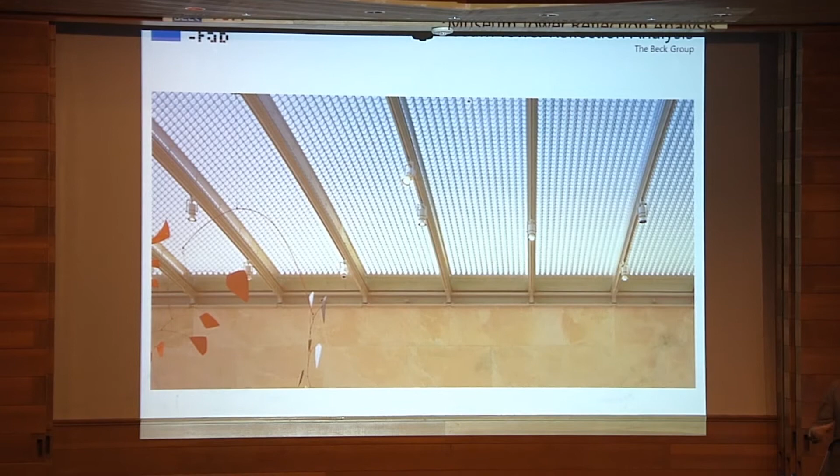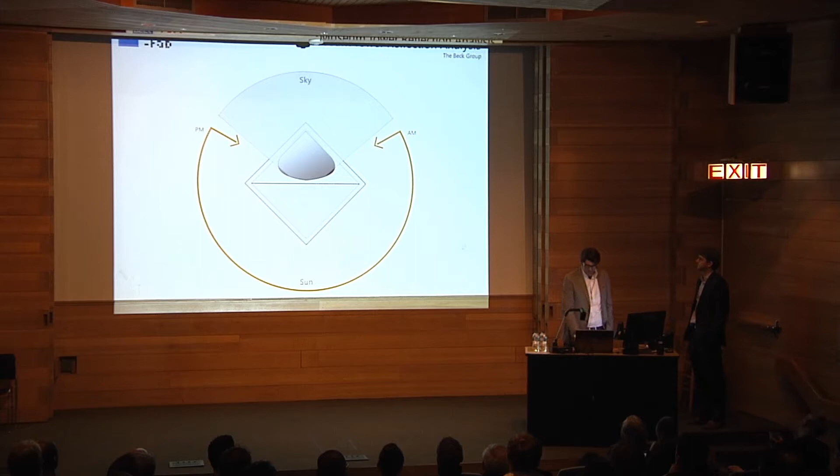So what they did is they developed a customized cast aluminum oculi system covering the roof in a smaller module. Here you see it from the top across the vaulted roof. And here are the oculi themselves, specifically calibrated to block all southern light and allow only the northern light. When you place them together in a small module, you have a clear view of the sky. Here is one of those individual pieces, and here's the scale, about 3.5 inches by 3.5 inches square on each one.

So within the last year and a half, when the Museum Tower started to be erected, they immediately realized that this could be an issue. The tower sits directly north of the interior portions of the galleries, as well as the garden. This was a site that was somewhat contentious. I think Renzo actually suggested to the city probably 12 years ago that this site should be reserved as a park, knowing that there could be issues of light reflection.

But anyway, about a year and a half ago, the glass started going up, and immediately we started to see problems as the interior galleries then became this. This is a very intense situation where the light is being spread over the galleries. Currently, they have put a temporary film over some of these spaces and have moved a lot of pieces out into other museums for temporary holding until they can find a reasonable solution with the tower.

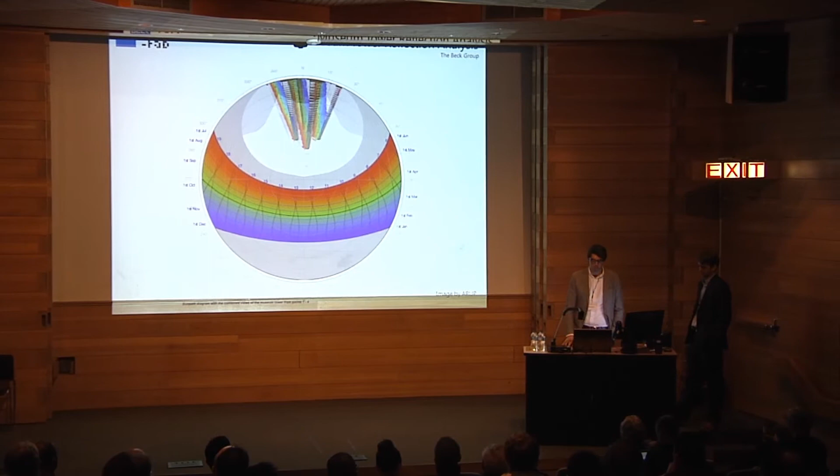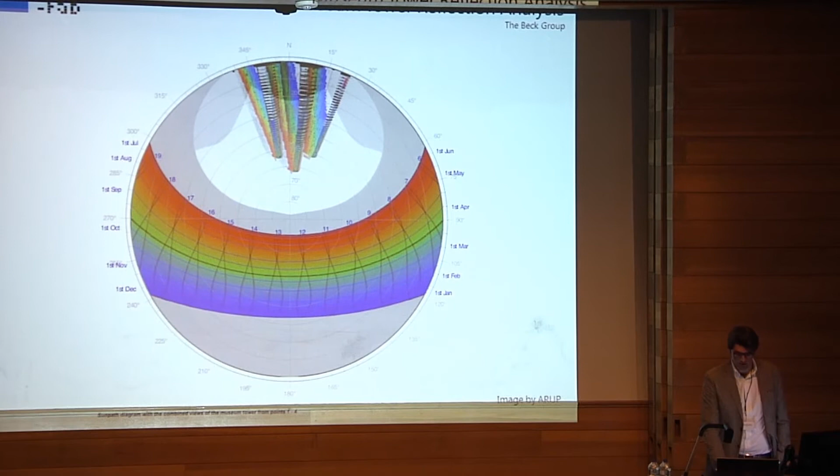They also brought on Arup, who was the original structural and mechanical engineer on the project, to do some analysis on heat gain for their garden as well as the interior gallery. So you see analysis that was done before we were even involved about how the light was going to, in a general sense, reflect off the building. Looking at the glass, 44% reflectivity is on the high side of what any building would use.

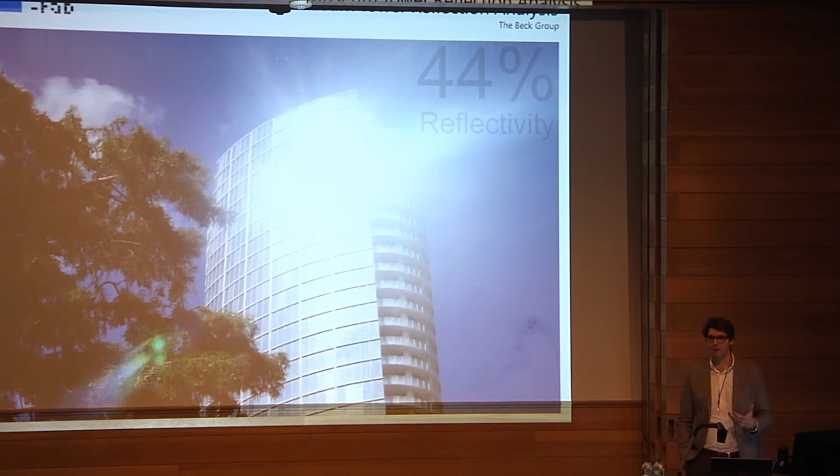This is about when we were called by the client, and they came to us saying, okay, we can very much understand in principle what is happening. The sun's hitting this building and coming into our building. But what we don't understand is the technical nature of it, where and when and how this is happening. I think it's appropriate to go to the next slide.

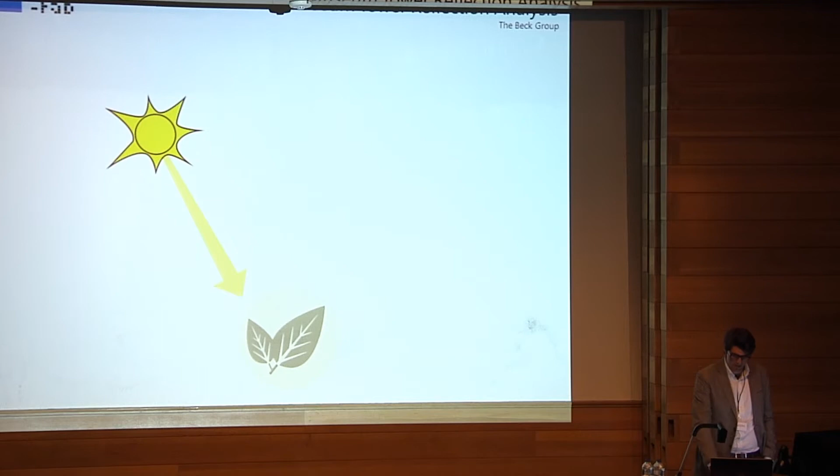As you can see, with their garden, once you just take the sun, it could be an appropriate situation, but adding another percentage of that sun could start to have negative effects on your facility.

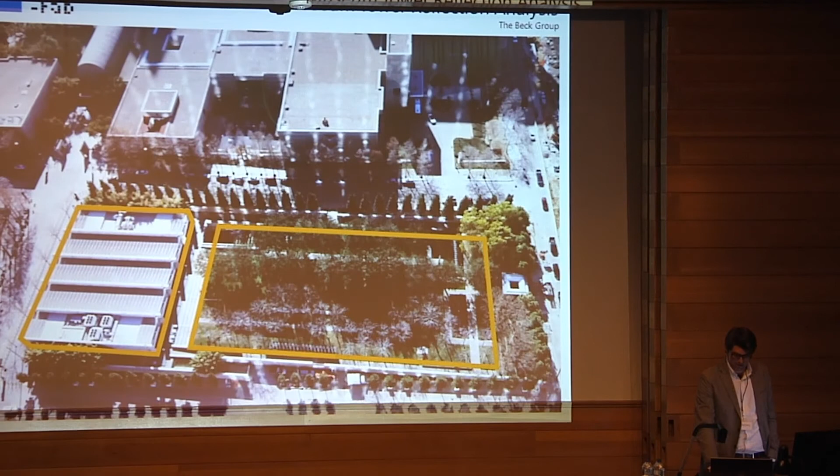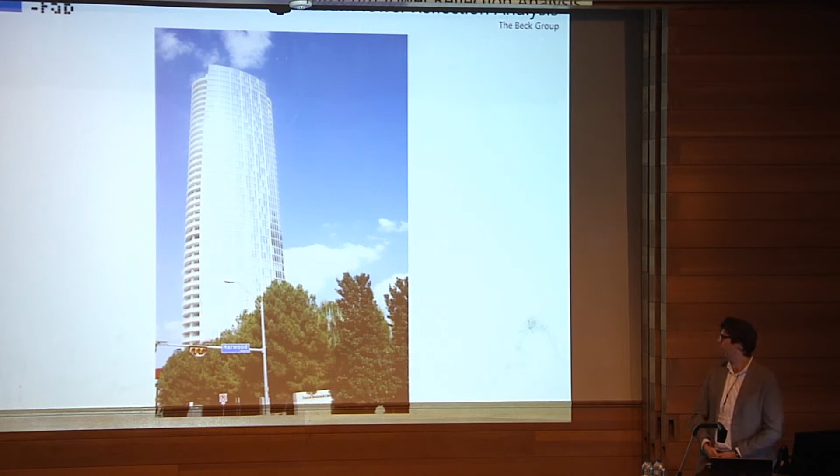So this building itself, here we go. The shape of this building, if you're familiar with it, it's curved in plan on either side and also has a taper as it goes up, and has over 1,000 unique 4.5 foot by 12 foot tall panels that all cant backwards as well, so it has a shingling effect. So every single panel on this building is oriented in a different direction, and therefore will have a different reaction when the sunlight shines on it.

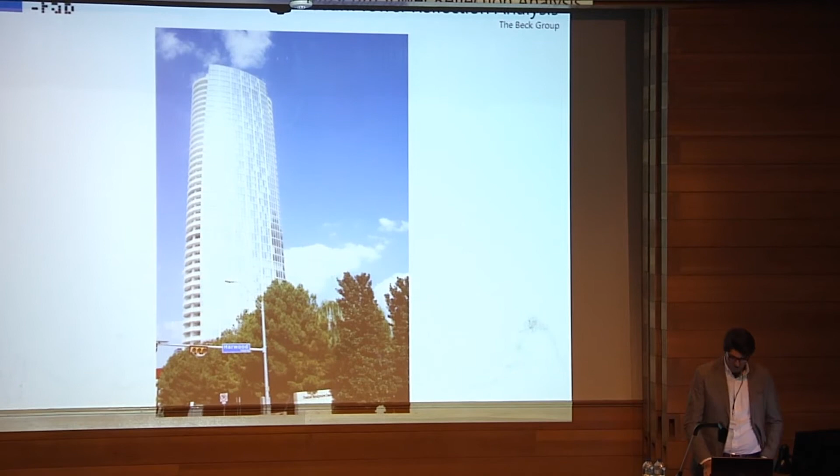So our task was to try to analyze this information in a short period of time to provide the client a more explicit understanding of the problem that they were going into as they were preparing to have discussions with the group from the museum tower. So our job was really to analyze this and provide them with a basis of knowledge for them to move forward.

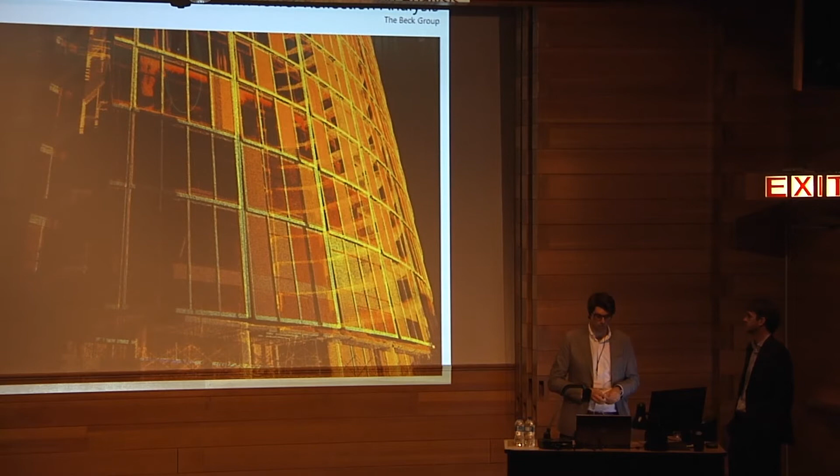So along those lines, as soon as we put our heads together, our first thought was, all right, there's many routes that we could take in order to solve this problem, but any of those routes, we know one thing's for sure, we're going to need an accurate model of the building. So one of the first things we did is call up a local laser scanning crew and sent them out to scan the building so we could get accurate as-built information on how these panels were forming. So that was step one of the process while we were still putting heads together.

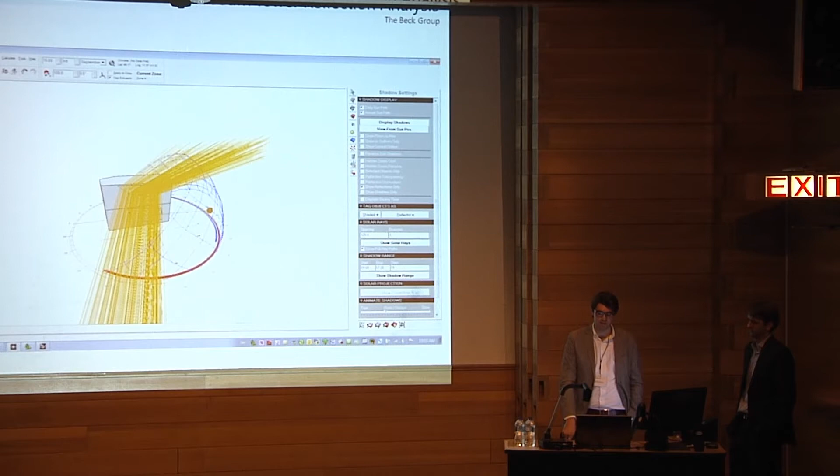Trying to figure out what we were going to use, we then went through a process where we looked at several systems and tried to evaluate what was the most appropriate software to use for this problem. While many of these systems like Ecotect had the capability to solve the problem, they weren't maybe as appropriately suited as others might be. With Ecotect, we couldn't customize the granular information that we needed for that problem.

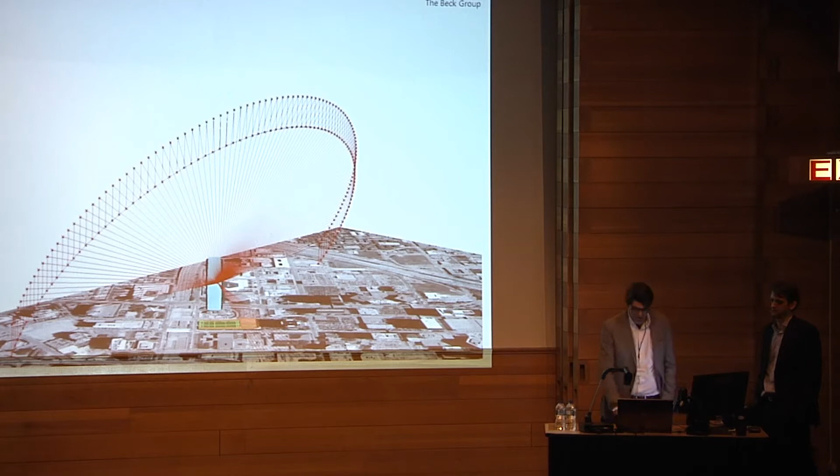So we went through looking at Ecotect as well as Grasshopper, and Grasshopper was a good way for us to quickly mock up potential ways in which we're going to understand these reflections. But considering all of the unique instances for all the panels and the amount of iterations and calculations that we have to run, feeding information back into itself in Grasshopper just wasn't going to work as well as we had hoped. But it did help us very much to design the algorithm that we were going to use.

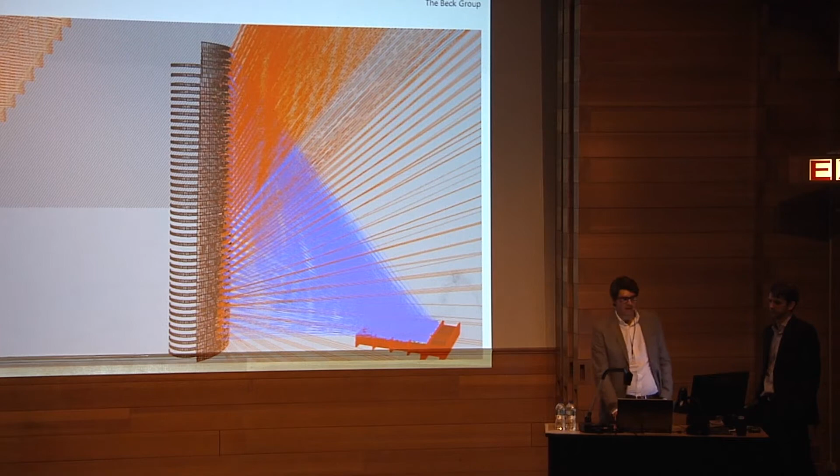And then we ultimately decided on scripting specifically with Python in order to run through these millions of calculations at intervals in a day to really seek out what was the worst case condition for every window on this building.

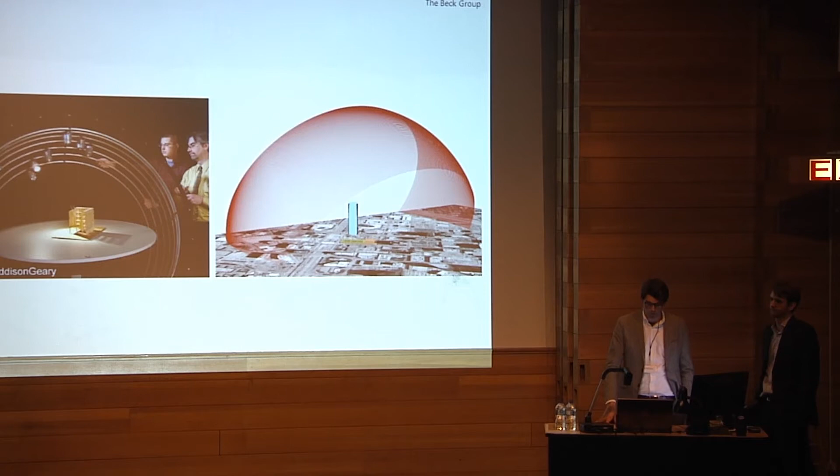So I thought this picture was pretty amusing, the traditional method of the Heliodon versus where we are now. We reconstructed the digital sun path within Rhino, so we could use those paths to generate points at which we were going to study this building throughout a day, taking those paths and breaking them down. And as we subdivided the day, we needed to be very specific on what points in the day were going to be the worst and what points were just bad situations.

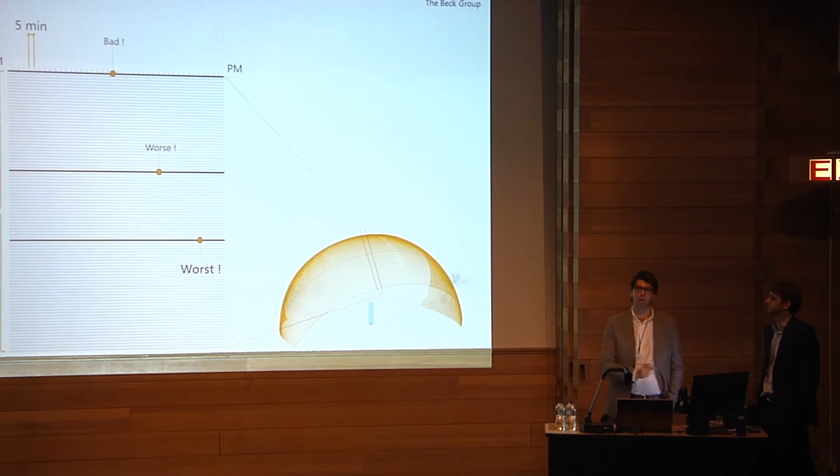So we had to base all of our calculations on pretty much the worst case scenario across the entire year. So every panel had to be calculated for a certain interval of the day across the entire year, studying both a condition that affected the interior gallery and the garden, as they have different areas and different relationships to the existing building.

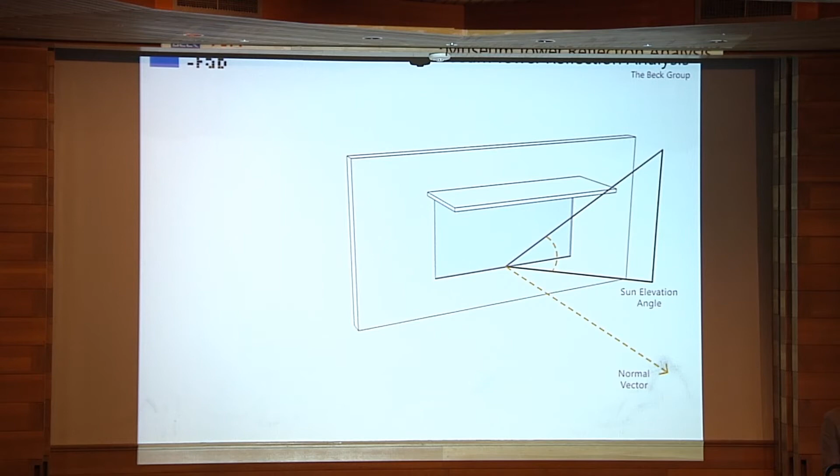One thing, if you've ever done reflection studies, is understanding that you're going to have to calculate a separate angle for shading systems as they relate back to the normal of each panel. And so, again, having a unique angle is going to give us a tremendous amount of data, studying not only the horizontal shading angle, but the vertical shading angle for each one of those panels.

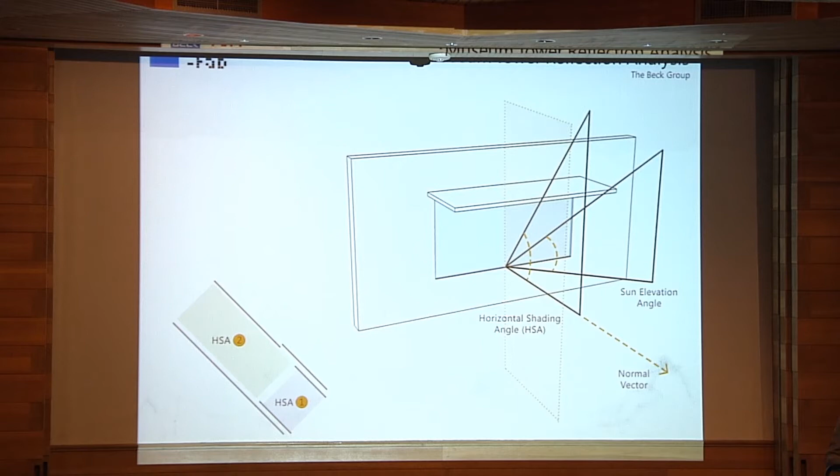So essentially, we went through this process, and aside from doing a few mock-ups, this was kind of our brainstorming effort of understanding that every instance on this building is going to have unique attributes. And we wanted to get to a point where we could have some type of collection of data for each one of these unique panels that we could ask a question and get an intelligent response from. So Frank is going to take us through the next portion of the presentation.

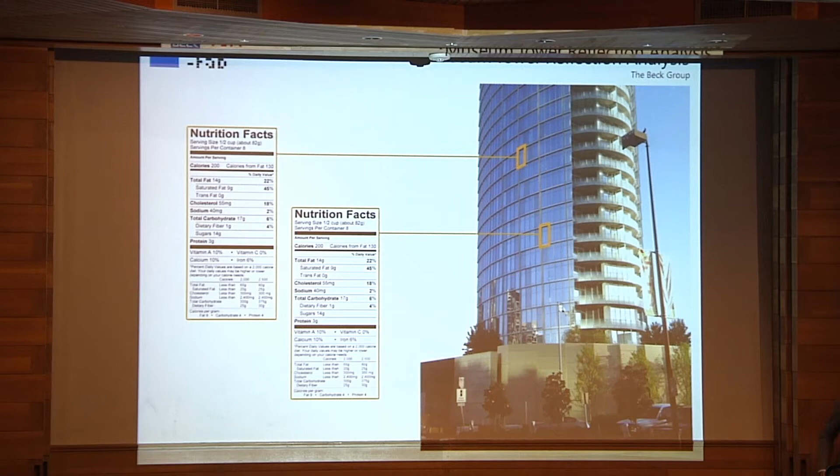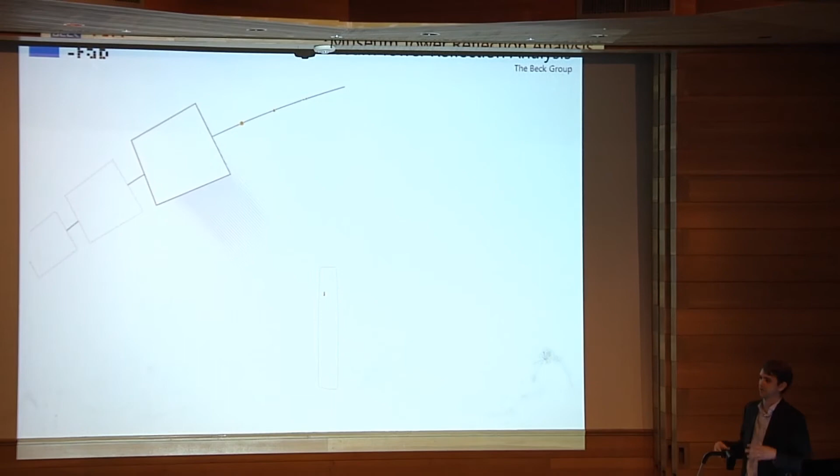Yeah, so sort of like we had these nutrition facts, we wanted to come up with a way to describe a curtain wall panel in a way that is not really particular to Rhino or Revit or any kind of particular platform. We started the process of writing a routine to just collect the information. We tried a couple of different things.

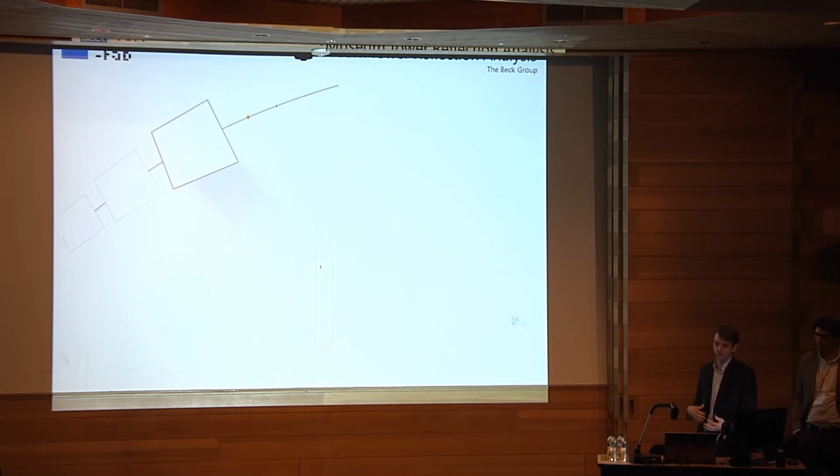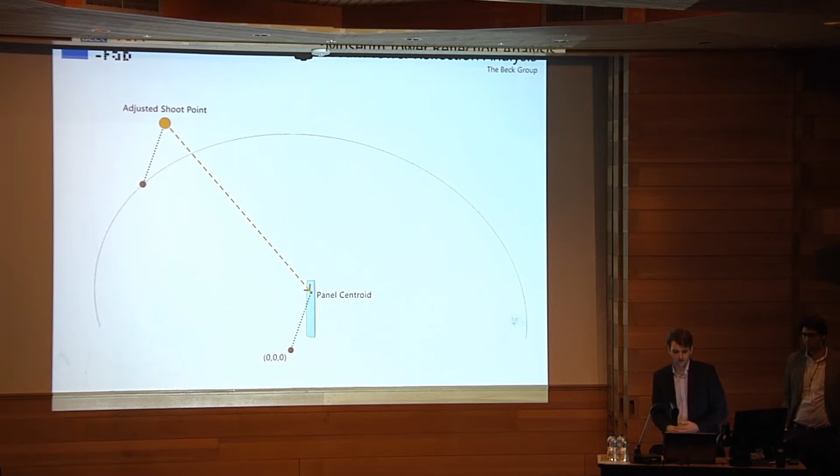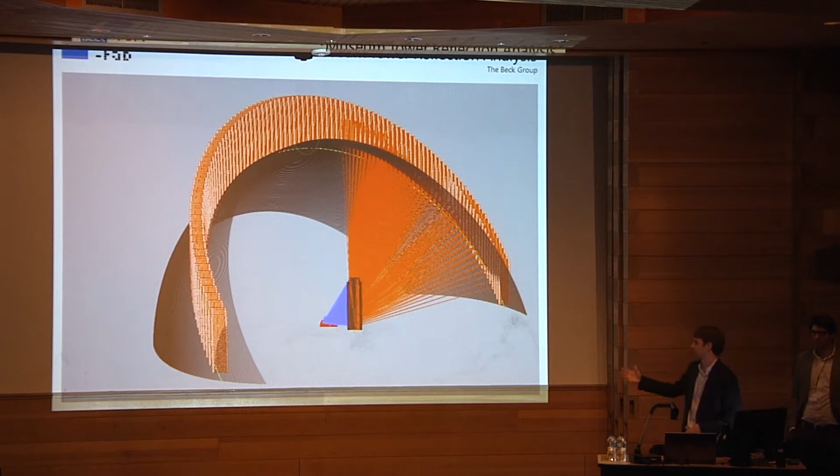This is sort of what one day might look like. I think those are maybe 15-minute intervals. So a lot of time. It's worth noting, if you look back at this slide, when you do this with every panel, you get the effect, if you look at these points going around the path, that sort of resembles the building side.

So how do we measure the horizontal shading angle and vertical shading angle? There are planes that are applied to these curtain wall panels, and then we just make the measurement. This is a lot easier to do than to try to do some sort of calculation. It's easier to make the thing and measure it.

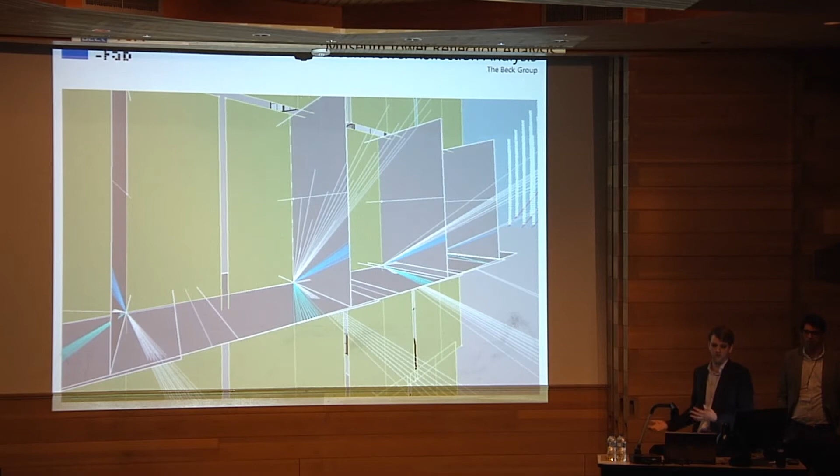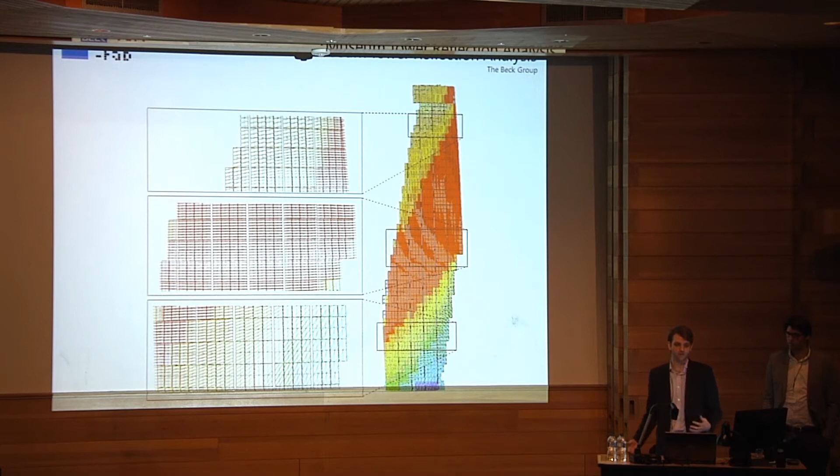We also were very hopeful that we would come up with a really slick, clever solution for the problem. We tried a lot of things, like this is the least amount of square footage of a louver system, but this is just for one day. So when you expand this across all the days, you realize there's not a great solution for this problem. Here's another example of that.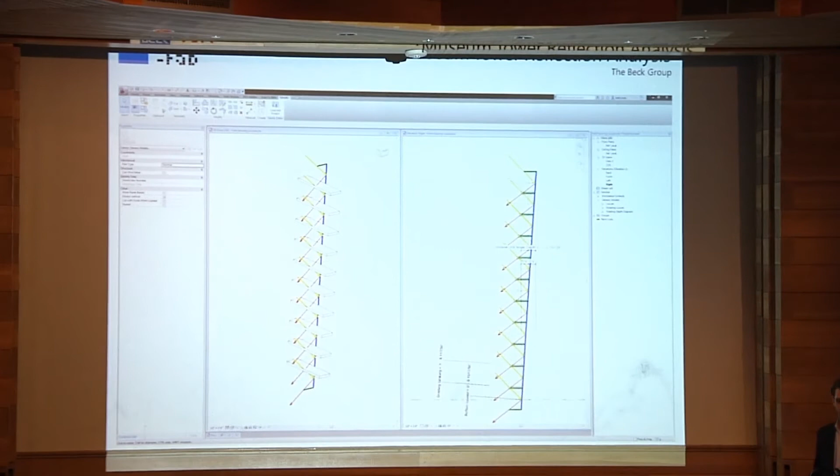So what we started thinking about doing was to bring this data that we're collecting out of Rhino into Revit. We had a guy at a job site who had some time, named Kelly Jones, who helped us make a family for Revit that we could place programmatically using a lot of the same code that we used originally. So this would be something where we could say solve for consistent spacing and vary the depth, or keep the depth the same and change the spacing.

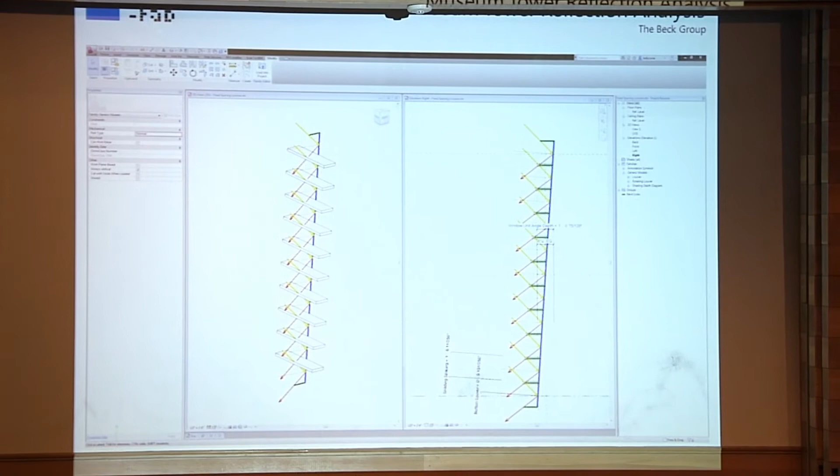I think it's something to note. I don't think we ever really planned or truly entertained having a horizontal louver or vertical louver option, but those were the most simple interpretations of angles that we could use to then make other judgments and explain that to the client. So that was the thought going into creating simple horizontal and vertical. Yeah, a lot of this is to demonstrate to others why this solution won't work.

So just a little bit about the technical process of this. Back to the nutrition facts type of thing. We start with a really basic description of the thing we're describing. In this case, it's a curtain wall panel, and it's got corners, and it's got a middle, and it's going to have a horizontal shading angle and a vertical shading angle, and there's nothing really about either of the platforms that we're using in that description.

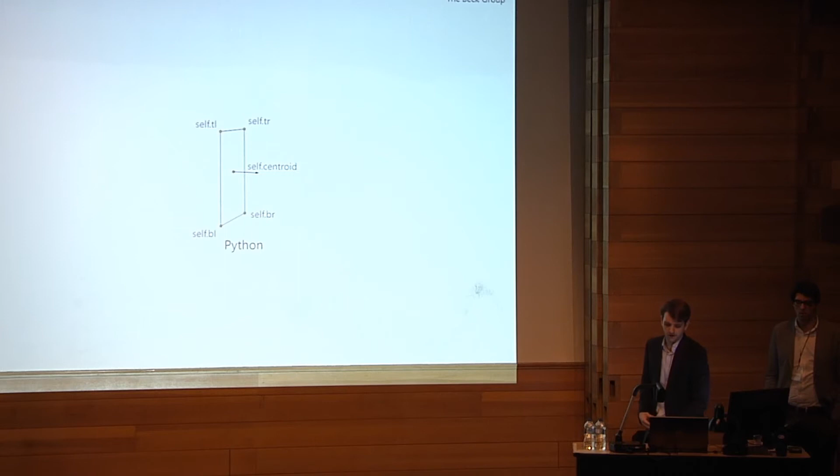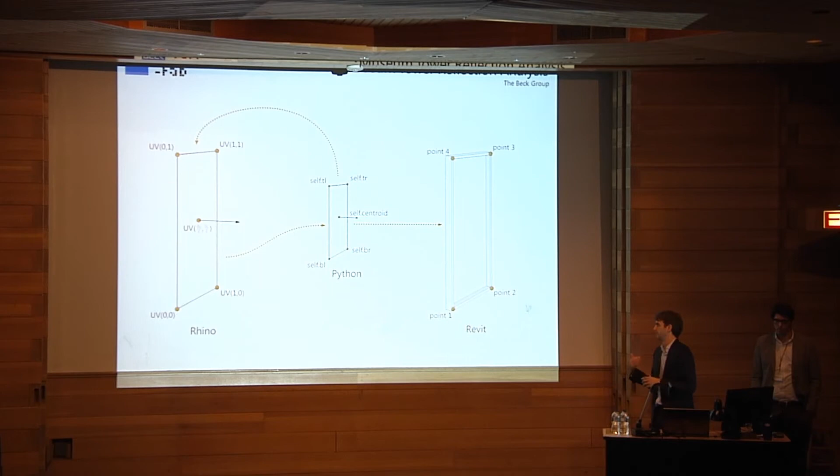And so that lets us use that same description to make the measurements and calculations in Rhino, and we also use the same description to then bring that information into a parametric family. Now, why would we put this in Revit? Here's sort of, this was hours of calculation. Very quick and dirty, and so we just stored these things in a text file.

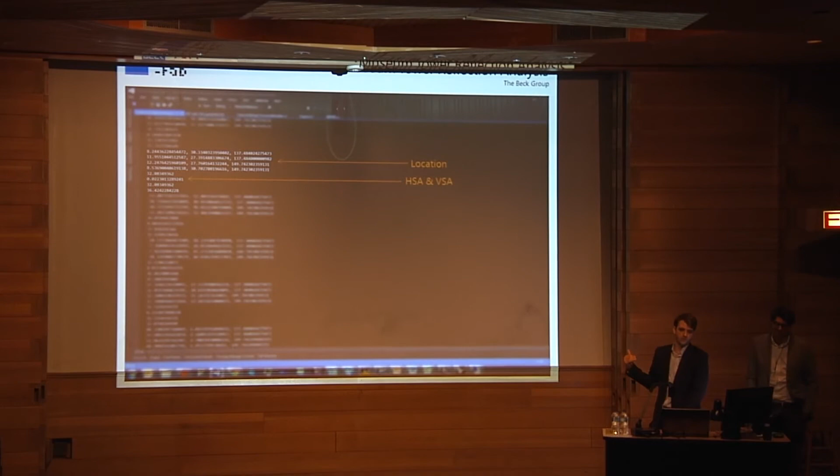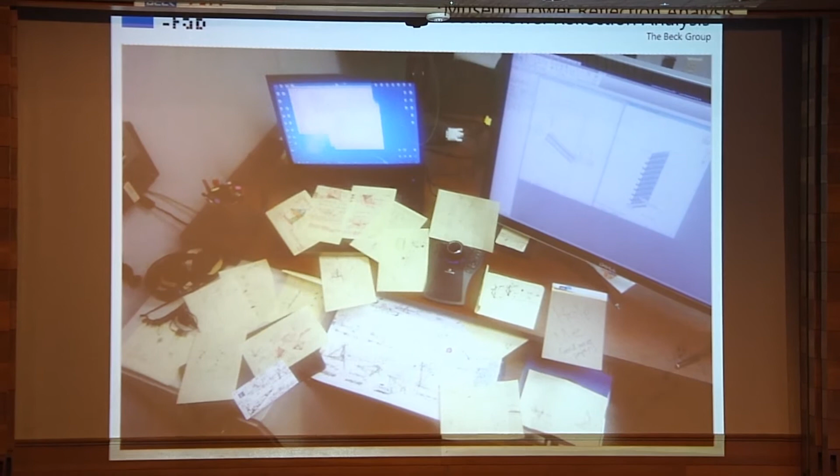So here's the family. Here's this guy's desk in the trailer. You'll see a lot of people using Python to place adaptive components and things like that in Revit. And placing a family like this is a little bit more complicated and can be frustrating.

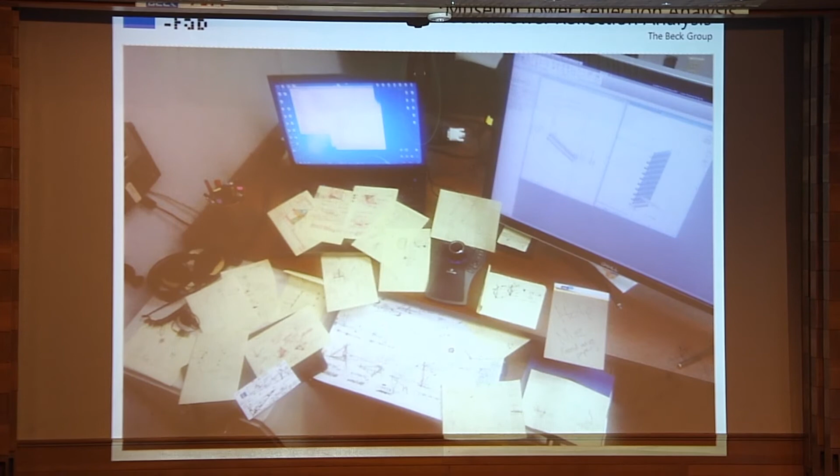So what that gives you basically is like a visual database of these panels that has all the information in it. So you can start to ask the panels about themselves and represent them in different ways, like a grading of color based on a different value, or which is better for this panel at this time, a horizontal or a vertical louver system.

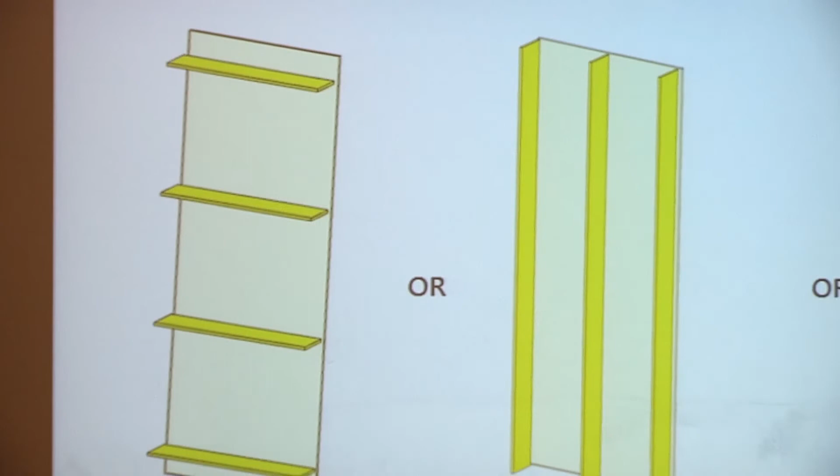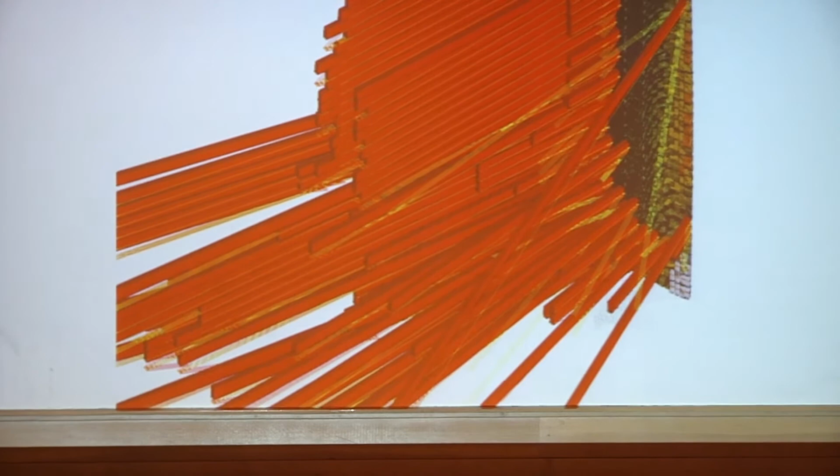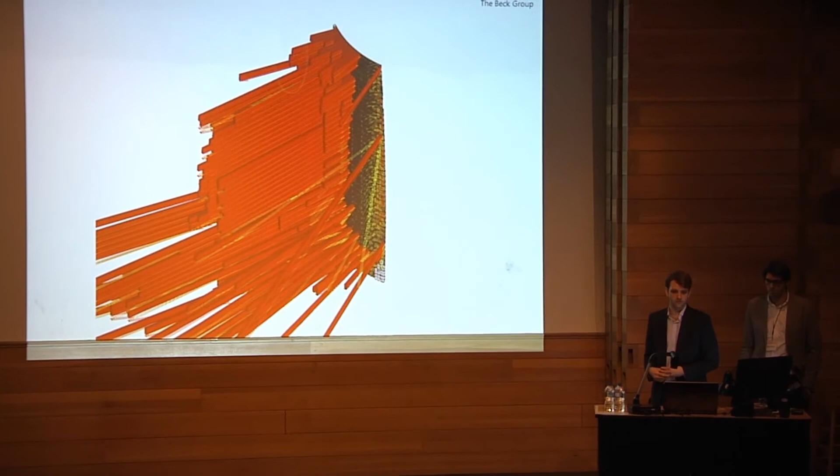And we did a lot of experiments. Like I said before, we were very hopeful that there was going to be some sort of clever solution for this. It was also good for demonstrating how poorly one of these solutions performs. I think this is vertical louvers, and we let the depth be whatever it needed to be to block the sun. So this has to do with how close the building is to the Nasher and how direct the ray would be. So pretty not feasible.

And so we continue to search for solutions that could mitigate both the problems, because there was a real issue, like you saw in the gallery, but also there is anticipated, we'll know a little more when we get to this summer, heat gain and breakdown of the plants in the garden once we reach our summer temperatures.

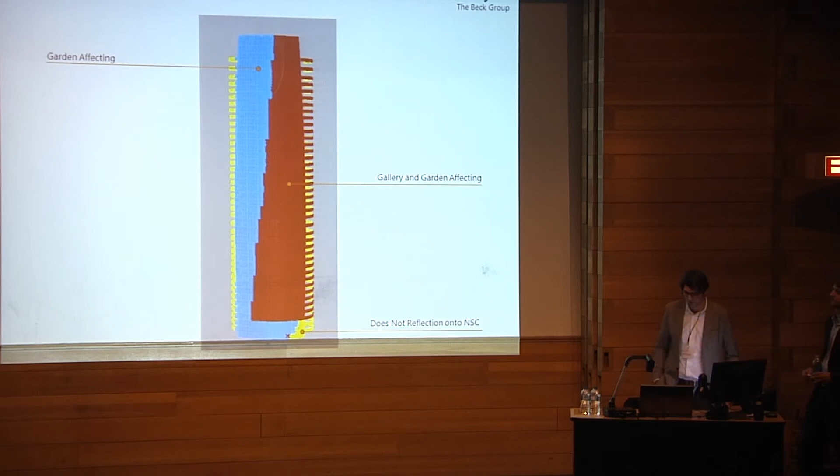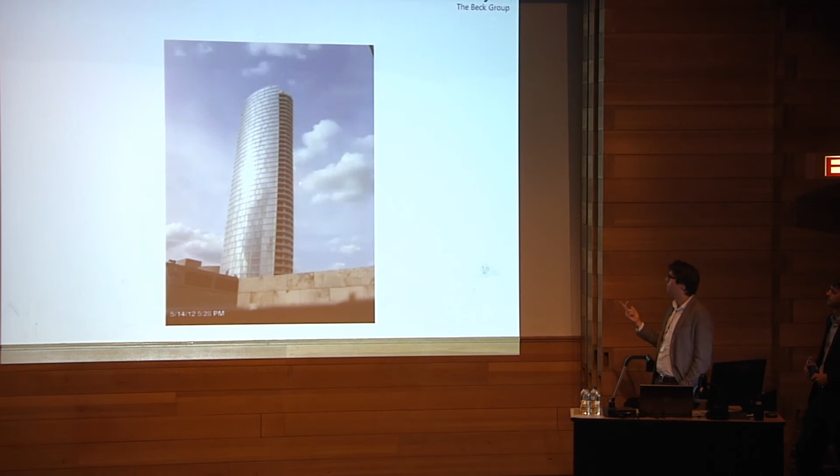Here's a quick time lapse from an iPhone on top of the Nasher. So you can see the movement across the building has that similar kind of high right to low left pattern that you saw of where the sun's going to stop shining on the interior galleries and start shining on the exterior galleries. And what's important to note, so this is just one day's time, is that we're describing over 1,000 panels, and some of these panels, 99% of the time, are not participating in this problem. It's for a very select time on select days throughout the year.

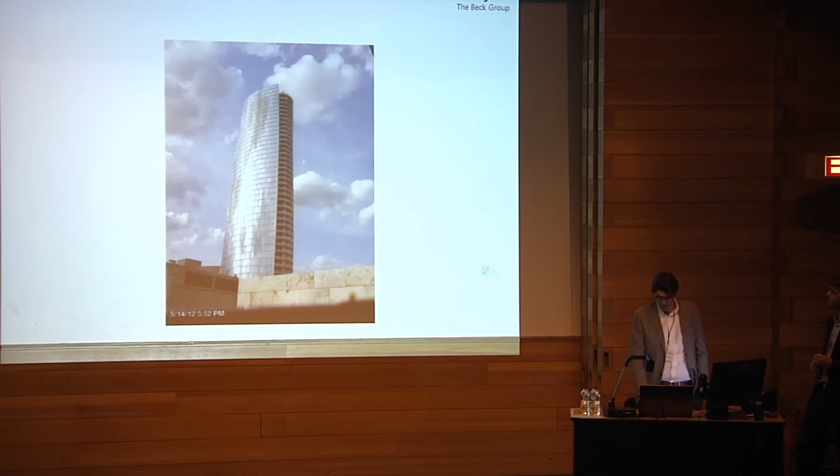So any type of fixed solution is going to be a pretty extreme investment when the majority of the time you actually have no need for any kind of mitigation. So that led us to look into dynamic solutions, and using the same kind of bones for the script, went through and asked this building, all right, so when do these need to be active or inactive? So we were able to run through very quickly and ask the building to basically paint itself when these needed to be protecting, under any conditions.

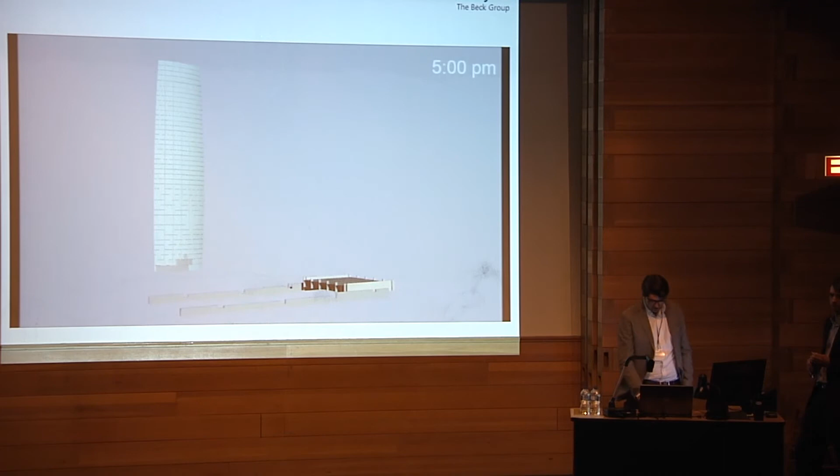So this would be summer solstice, and you can see how it goes pretty high to low. Equinox is slightly different, and then throughout the year it changes based on that. So as you can see, even just after the summer months, the top penthouse, the $10 million penthouse tenant, is only going to need to mitigate the apartment a select amount of time each year. Just for reference, the winter stays pretty much primarily at the bottom of the building.

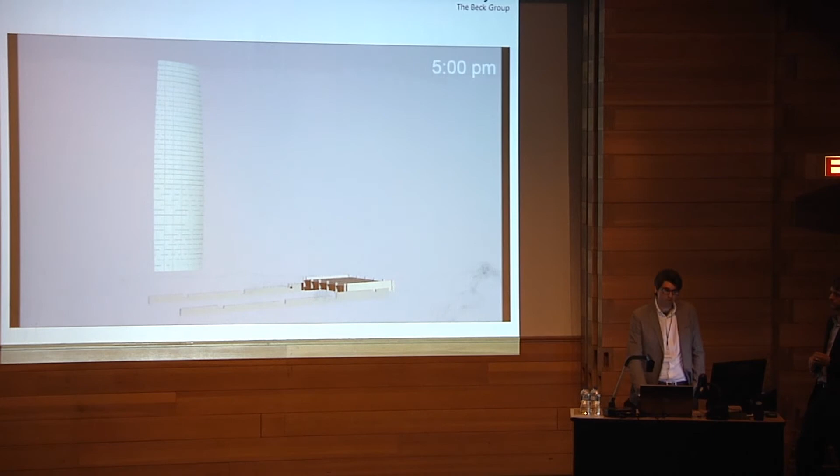So this was an opportunity for us using pretty much the same bones as in the code: shoot this panel with a ray. If the reflection hits the side of the building, then change that panel's color. And so we could very quickly move from something that's outputting angular data or locational data to taking a picture or a screenshot. And it was information that our client could understand very easily.

And that brought us to looking for dynamic solutions. This is a building I visited in Germany. This is an automated, almost roll-type louver system, stainless steel, that can be programmed to operate either on amount of total sunlight, or could be programmed on a timing system to be deployed.

You can see here it's a very beautiful system, and it was interesting to go to the manufacturing plant and actually watch the guys assemble these and put them together, which is kind of the very real aspect of what we're doing. We can mess around with calculations and showing you what the pattern's going to be, but until you really go and understand how this thing's going to go together and fit on the building, it's kind of all for naught unless you really understand that aspect of the product.

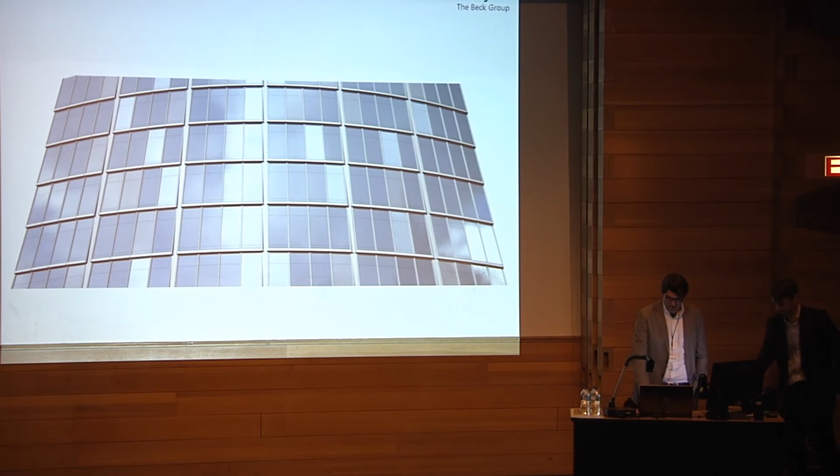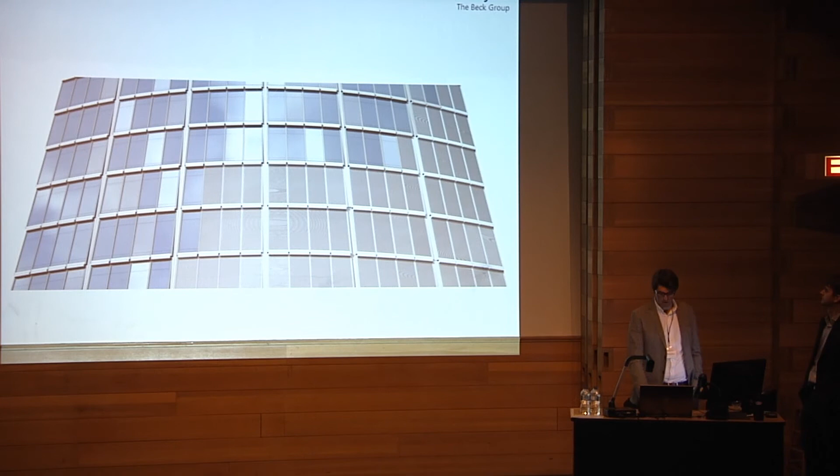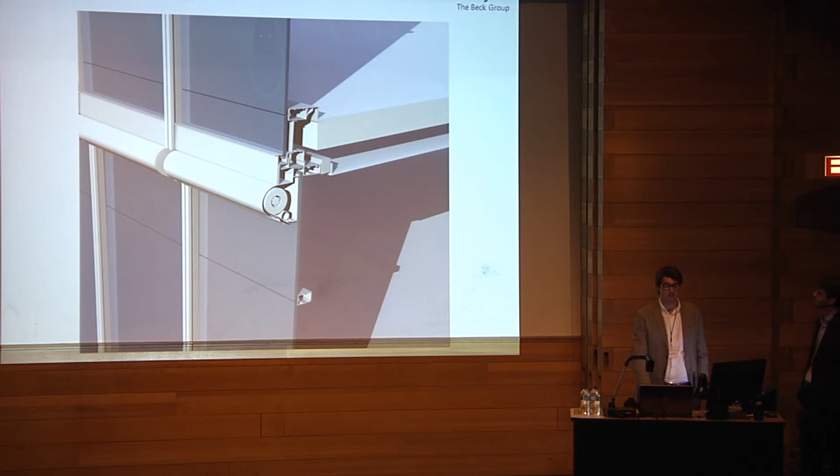So here's the existing facade, the proposed added housing for the shading system, and then the appropriate deployment when it needs to be deployed. The existing curtain wall system, which conveniently happened to have a shingling, like I said earlier, to make a cavity for where our unit would go and be connected and, we anticipate, easily waterproof up under that system, and then deployed when necessary.

The end result being a dynamic facade that would change throughout the day as well as throughout the year. Could be an interesting development on this program. You know, we're not the architect for this tower, so we're always trying to respect as much as possible the character of the design, but also provide a solution that will be workable and reliable.

Kind of wrapping up, so you see that although this problem is not necessarily like a form-finding example, we did use these same tools and techniques in order to solve a problem that was very much a threatening real-world problem. So I encourage you to be exploratory throughout your work, whether you're using these tools to design buildings or to analyze your designs or other buildings. It's very useful, and stay curious about all the things that you can do and how those things move across several platforms.

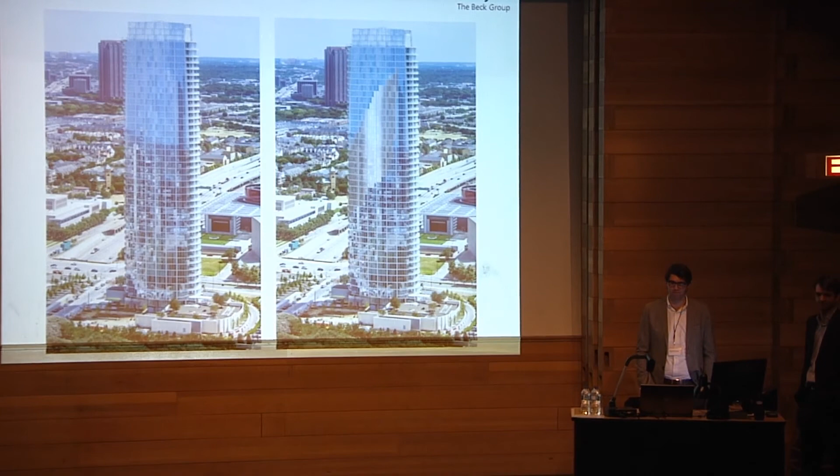Does anybody have any questions? But I don't know where we sit on time. I'm trying to hurry.

Did the fact that the individual panes were tilted and it wasn't a smooth surface have any real impact on resolving the issue? I mean, if it had been a smooth surface, ostensibly it would have been relatively similar, just a different pattern. Is that it? The canting backwards at each panel wouldn't have really changed anything. The calculation would have been unique in its own right. It just changed maybe the time mitigation would need to be there, by maybe 10 minutes, because of the sun moving so rapidly through the sky in terms of angles.

But you know, one of the biggest things was that the facade is curved in plan and also in elevation. So think about it, a flat building is going to have pretty much parallel rays coming off of it. So basically, not too dissimilar from the Ecotect image you saw, a beam of light coming and a beam of light coming off. Once you actually start to rotate that, it creates more of a disco ball effect, where these are scattering out across all of the land in front.

So is that tapered and convex form the least ideal, in terms of if you had to go back and re-engineer the building, you could make a concave facade or something? Yeah, but you would almost consider that a concave facade would be actually worse, because then you're focusing right on that sort of thing, which a lot of buildings have issues with. Once you did the other way, it'd be basically a ray gun shooting a single spot. So be aware of that when you're doing concave glass facades, that you're not using a percentage of glazing that will then magnifying-glass your site.